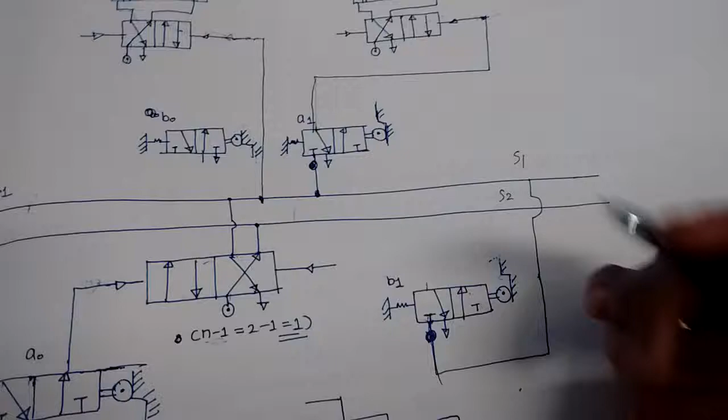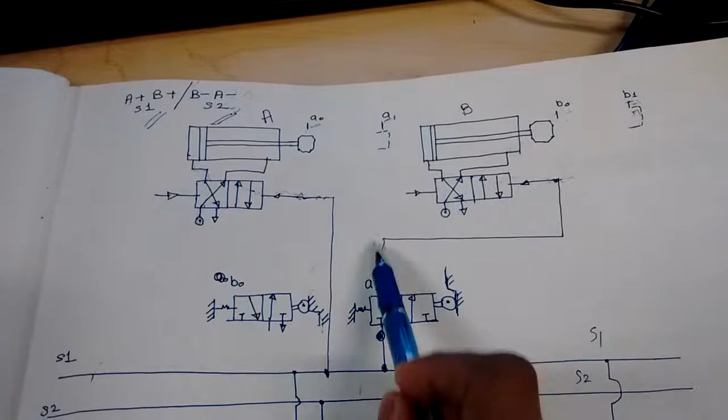So we were here. Until now, A plus is performed, A1 is pressed. Due to A1, this limit switch is pressed. Hence, as this limit switch is pressed, B plus is performed, then B1 is pressed, and now we are over here.

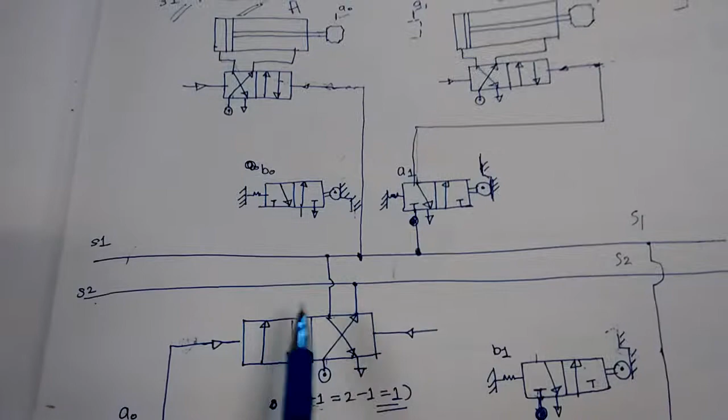So as B1 will be pressed, now what we need to do is switch to another pilot line for performing a different group of operations. For switching that, we need to switch the position of this valve back to the position shown here, so that S2 will be on and S1 will be exhaust.

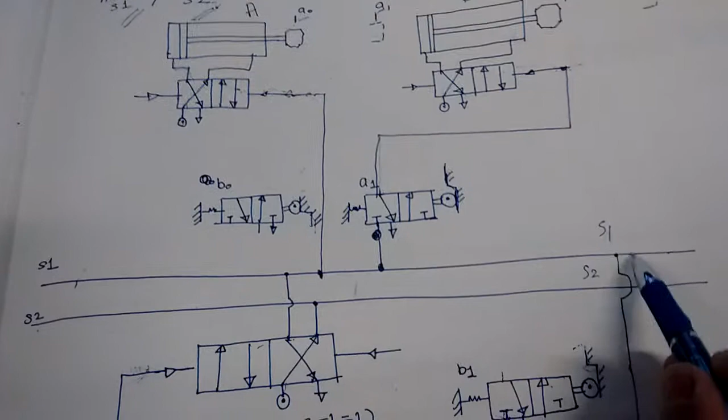To do that, currently S1 line is on. Initially, somehow after the start, we switched the position of this valve so that the compressed air supply is going to S1. Now what we do is directly take the supply from S1 as input to B1.

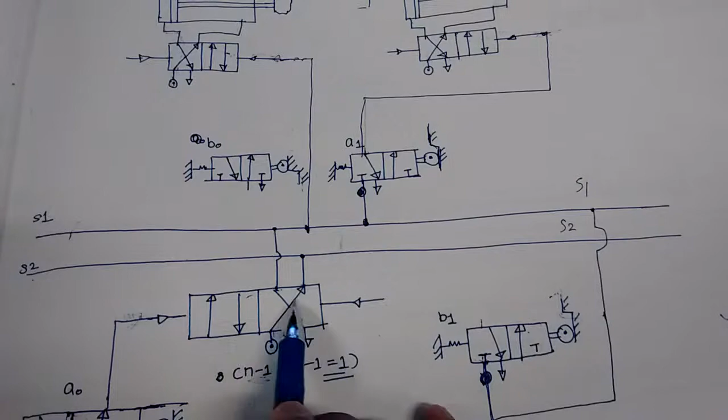And when B1 will be pressed, the supply will go over here and it will switch back the position of this 4x2 direction control valve. As the compressed air supply goes over here, it will switch the position of this valve into the current position shown, and S2 would turn on while S1 will be off automatically.

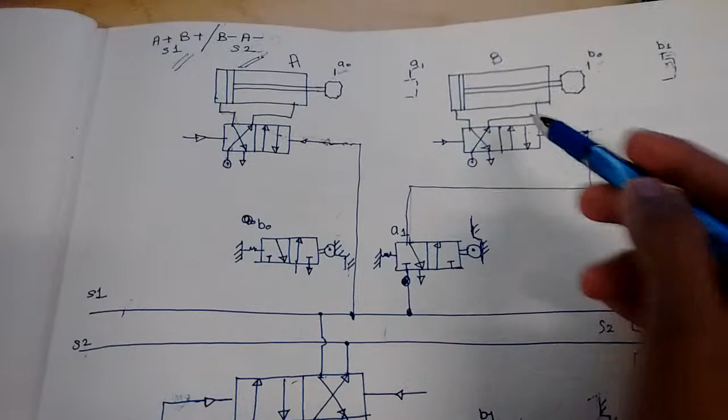Now as S2 will turn on, the first operation we need to do is B minus. So immediately after S2 is turned on, we need to do B minus. For B minus, we need to switch back the position of this valve to the initial position as shown in the figure, so we'll connect this directly.

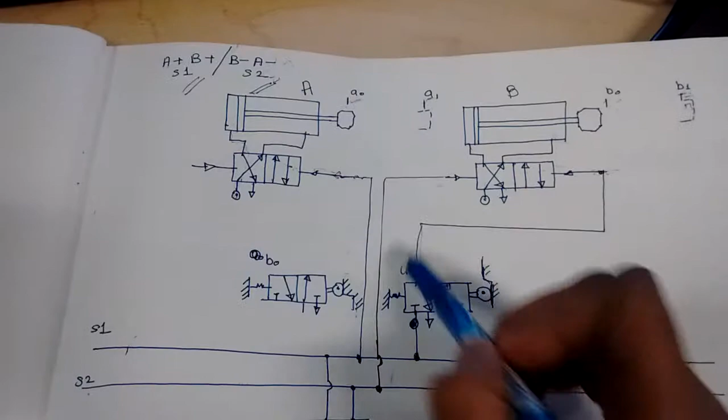We'll connect this directly to S2. Now after S2 is on, this position of the valve will change to the given position and B minus will be performed. Once B minus is performed, B naught will be pressed.

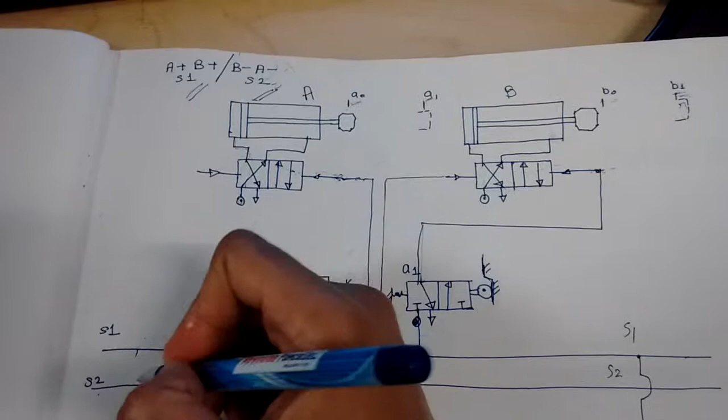After B naught is pressed, B naught detects B minus is performed. We need to perform A minus. To perform A minus, we need to connect the line S2 with A minus, so that once compressed air supply is over here, we'll switch this back to the initial position.

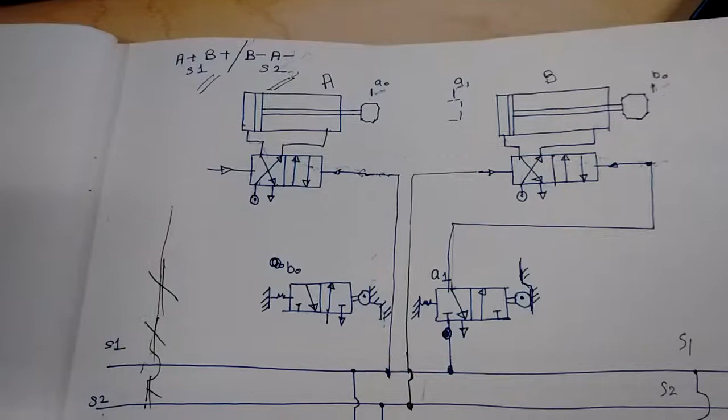But however, we need to pass this through B naught, as once B naught is pressed we need to perform A minus, not before B naught. So what we'll do is take the compressed air supply and pass it through B naught.

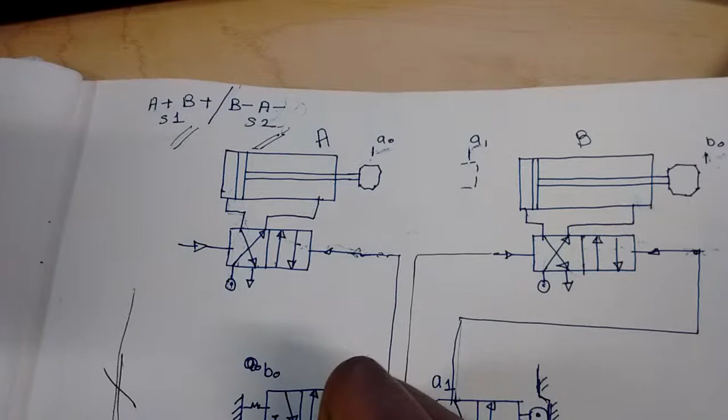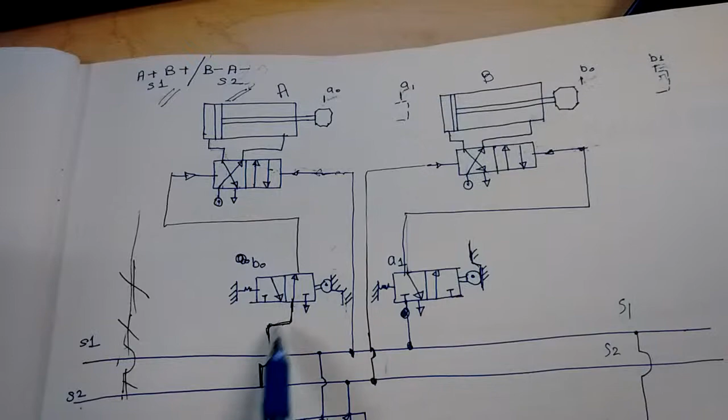So we did pass the compressed air supply to B naught, through this position. Once B minus is performed, B naught will be pressed. This press would be detected by B naught, and as S2 is connected to this 4x2 direction control valve via B naught, once B naught is pressed, the compressed air will switch the position of this valve into the given position and A minus would be performed.

So this is how the entire sequencing circuit would work.

Now one thing we did not cover is how the start button would work. As I have explained earlier, there are two kinds of start switches available: one is the push button, another is the lever kind of thing.

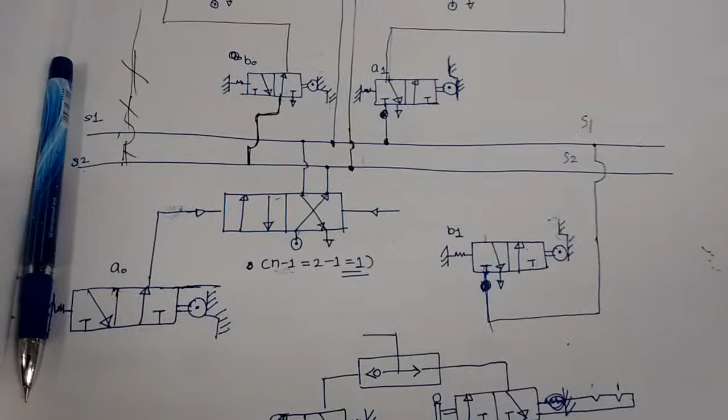However, if we directly give the compressed air supply from the start button to this valve, the problem that would occur is even when the operation is going on, like A plus, B plus, and in between the operation, if somebody just pushes the start button, the entire position of this valve will switch and the entire operation will abort. We don't want that happening.

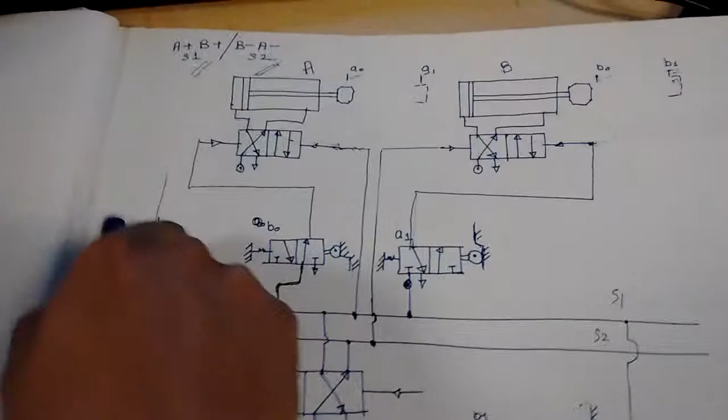So what we will do is take a look at the last operation. The last operation over here is A minus. So when A minus will be performed, A naught will be pressed. One thing you need to observe is we have never used A naught in the entire circuit.

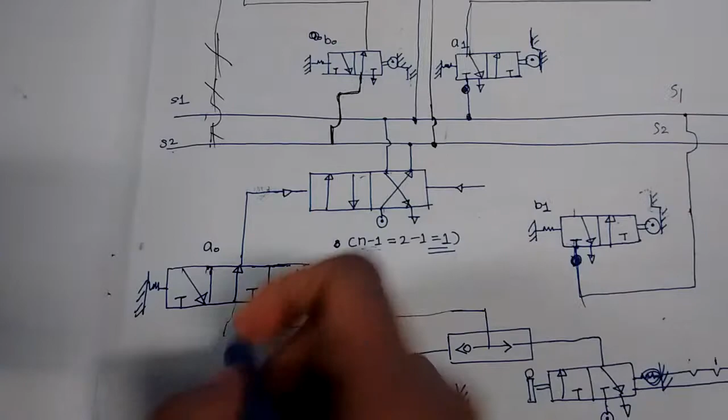Now we'll use it. We'll just place the A naught valve, which is the limit switch, over here, and we'll pass this supply through A naught. So the basic idea of this entire thing would be: when we press the start button, only when A naught is pressed—

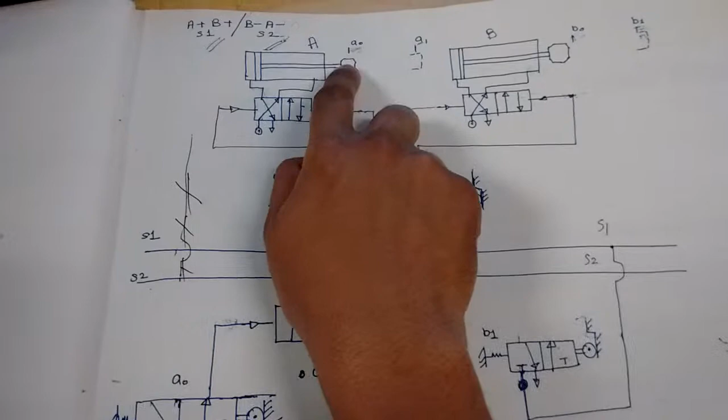that is, only when cylinder A is in minus position, this position will be actuated and the entire circuit will be performed. Once the sequence starts, A will be no more in A minus position; it will be in A plus position until the last operation. So in between, if anyone presses the switch, this won't be actuated, and if I press the start button in between by mischief, the compressed air supply won't reach this valve to actuate it, and hence this circuit—